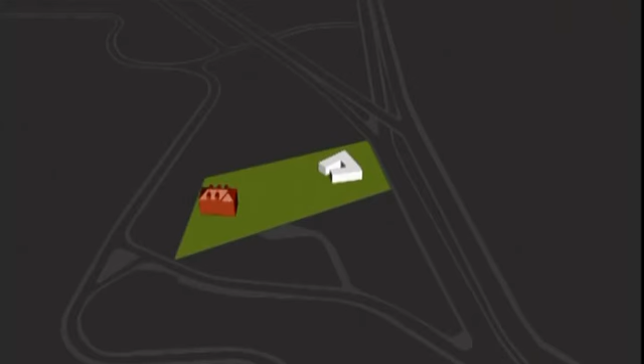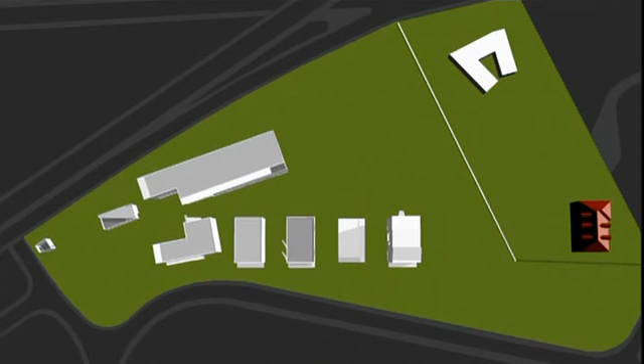When Siza built this first pavilion, total uncertainty continued to reign over the future of the project as a whole. The main faculties were squabbling over the best positions on the site, and the architecture faculty, both new and much smaller with room for only 500 students, wasn't the best place to obtain land and financing. It wasn't until 1986 that it finally obtained the large plot adjacent to the former property. Construction would take many years. The faculty wouldn't be officially inaugurated until 1996.

It's a disconcerting set of around 10 separate buildings whose differences have been deliberately accentuated, like the pieces of a puzzle already in place but as yet unassembled. It's hard to figure out how to approach it. The site has a lot to do with this, the triangular shape of the plot of land and its incline, the presence to the north of the faculty of the access roads for the Lisbon motorway.

But the architect has also confused the issue by suppressing all the usual markers in a building of this type. No main entrance, no main facade, just a more expressive side facing south. But you have to cross the river to see this, or rather to imagine it. The faculty plays hide and seek among the trees. The architect uses the vegetation to cloak the importance and coherence of the complex, as if he wanted people to believe that his buildings have grown here and there as if by chance.

In fact, he has built 4 small towers in a line facing the river. Between the 3rd and 4th tower, an empty space, a missing tooth, where only the base of the building is outlined. As often in Siza's work, there are several explanations for this missing tower. According to some people, the architect's plans were too ambitious, and he had to remove a building to respect the surface area outlined in the specifications. But Siza himself claims that he removed this tower to break an excessively orderly line and to open up the view of the river valley.

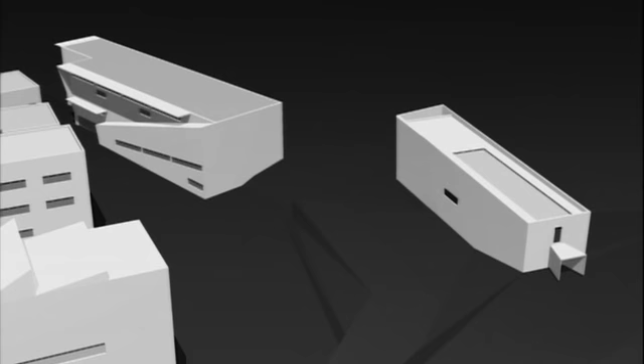To the north, on the contrary, enclosure is the rule. 2 large areas linked by a half circle form a continuous wall along the motorway.

The patio, the school's yard, also has an irregular and contrasting shape. A mineral side squeezed like the tip of a triangle. The other side wide open, leading in terraces to the garden of the former property. This shape is partly a result of the plot's initial shape.

But whenever the opportunity arises, Siza underlines the fact that the general plan of the faculty is a large-scale reproduction of the shape of the initial pavilion, a U whose base is the wall of the former property. It's as if the project were developing according to its own geometric laws.

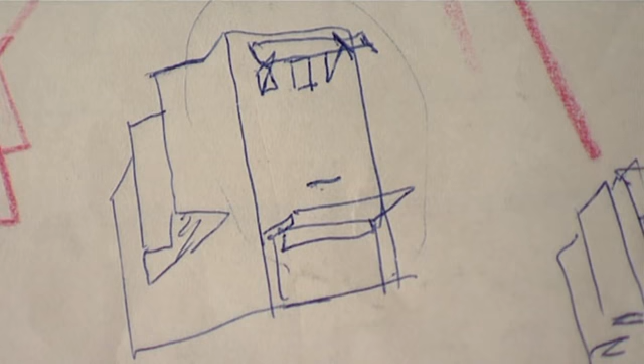But irony is never far away in his work. There's something mischievous about these buildings with their outlandish capped and helmeted outlines that look almost human. Even so, this formal diversity is the result of simple technical imperatives barely reinterpreted by the architect. The Iroquois headdress of the highest tower conceals the north-facing windows of the design workshop. These two large sun visors that Siza chose to place vertically transform the neighboring tower completely.

This formal variety contrasts with the large blank walls of the northern buildings, where Siza has housed all the faculty's collective services and large-scale installations. The students have the river view. The offices have the motorway view. A genuine architectural decision.

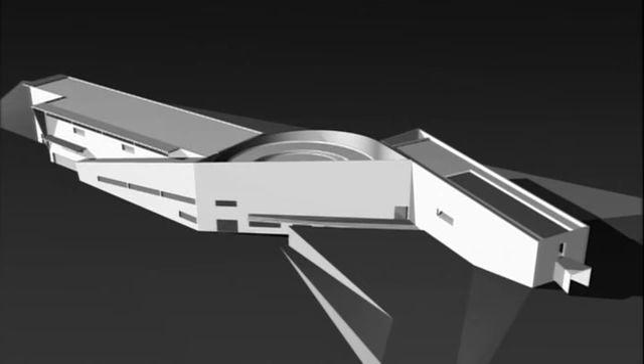To the north, a climate of war reigns. The faculty, assaulted by the traffic on the Lisbon motorway access roads, is defended by a barrier made of 3 terraced buildings whose bulky appearance is counterbalanced by ruptures in their positioning, the tensions between the curves, straight lines, and diagonals. But these zigzags are yet another way of clearly underlining the order of the program. The first block houses the auditorium, the half circle the exhibition hall, and the final block, the library.

The organization of a building must be very clear. I don't like buildings where you feel lost, where you cannot work out which path to follow. Even though exceptionally, I like labyrinths, although a labyrinth is something different. But basically, you need to have a very clear and obvious layout, along with some alternatives, not something imposed.

The itinerary is a very important theme in the general makeup of a building. It's the link between the different areas. It cannot be imposed, or a building soon loses its meaning. It's all over. You can't order people to go one way or another. No, there are other needs, and the relationship between these areas must extend into a great freedom of use.

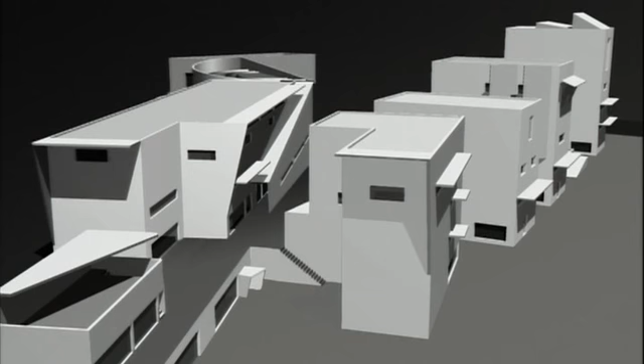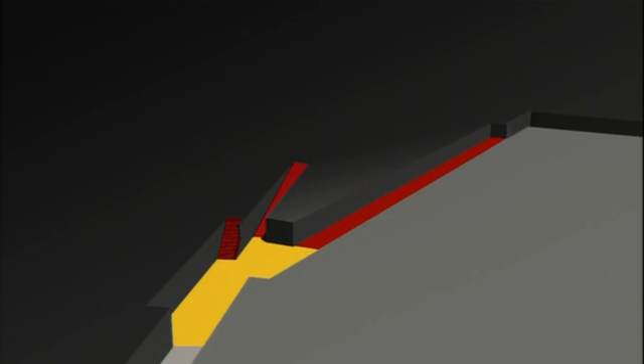In this way, all journeys within the faculty are split in two. The patio itself is a sort of hub serving all the buildings. But you can also go from one tower to the next via a long underground corridor passing beneath the patio and linking the towers. This corridor ends in another small square where either a ramp or a staircase leads up to the north building. This may not be a labyrinth, but it certainly looks like one.

Movement around the north building follows much clearer lines. This diagonal shelters an inclined ramp used for most journeys around the building. The inclined ramp is the playful conception of movement. It clears the space, opens up the view, and turns the journey into a spectacle.

The way that Siza enjoys playing with sharp angles and diagonals makes the architecture faculty like a cubist sculpture. At times, he comes up against an obstacle, a right angle, a straight vertical like this pillar resulting from a structural imperative. Never mind. The architect becomes a sculptor and decks the pillar with a sort of false nose, a purely decorative effect. But it's the architect's desire to force all the elements to take part in this vast game of diagonals, present throughout the building, from its most open spaces to other, more secret ones.

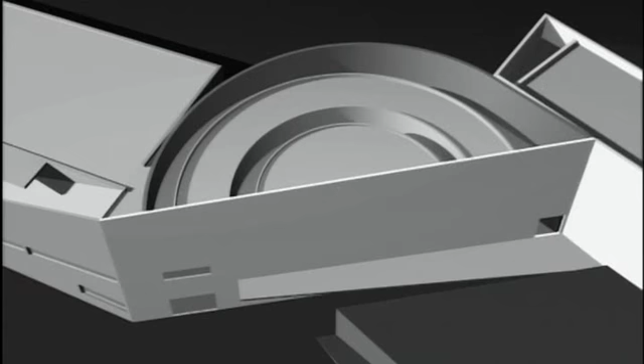It bounces off the reflective surfaces hidden by false ceilings. Filtered and modeled in this way, the light seems to be coming from the very curve of the wall. In the adjacent library, the zenithal light source forms a stark contrast in the reading room that an inverted glass roof cuts into two like a blade.

Another play on diagonals and sharp angles, another spectacular and surprising effect that, coming after so many other coups de théâtre and bravura displays, could seem tiring. However, that would mean forgetting that we're not in an ordinary building, but in a school whose very object is architecture. The abundance of solutions isn't an end in itself here. Aimed at apprentice architects, it's a continual incitement to reconsider space.

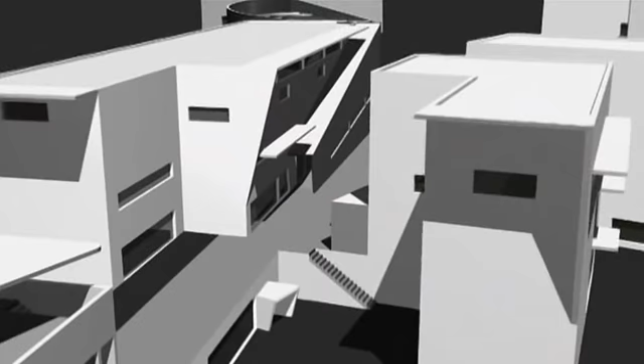A building built by an architect for other architects. A sort of ideal city of architecture. But this isn't what Siza was aiming for. The faculty entrance isn't at the tip of the triangle. Siza planned it 100 yards or so away. There, the architect has built a kiosk in his style, both open and simple, slightly askew, and with just a hint of irony. A sort of airlock through which the faculty was to communicate with the rest of the campus.

But clearly it hasn't worked. Because of the lack of funds for peripheral installations, because of the lack of interest of the great faculties for the more recent among them, and its odd-looking buildings, the faculty has ended up with unfinished surroundings, huddled up on itself, invisible to everyone except the clued-in motorist who manages to make out this sign at 50 miles an hour. The faculty today.

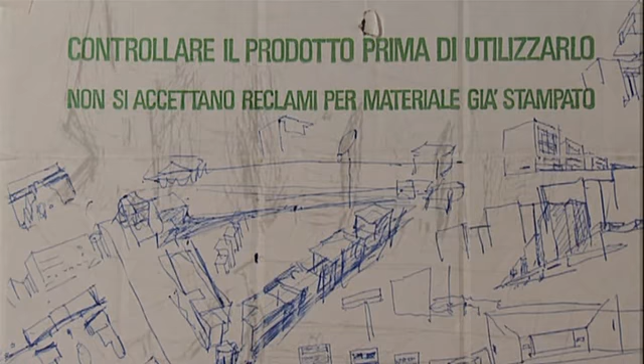But in the architect's drawers, another drawing tells a different story. Such as this one, where the ghost of the missing tower continues to feature. Or this one, even older, where the buildings gradually knit together and where we discover the birth of the project in reverse. The triangle closing and altering until it becomes a simple cube, the initial drawing, the first idea.

Siza found his inspiration for this hollowed-out cube plan in the finest building in Old Porto, the Bishop's Palace, that also dominates the banks of the Douro. In the mind of the faculty's architect, the most important thing that he had ever been asked to build in his home city had to be the modern counterpart of the old palace.

But the trouble is, a few miles away, it's no longer the same city. And rather than obstinately strive for his dream of monumental grandeur, Siza chose to shatter his project, to harmonize it with the jumble surrounding it, simply because that's the world that he builds in. A world where the only place that his building can be seen from in its entirety is a hypermarket car park.